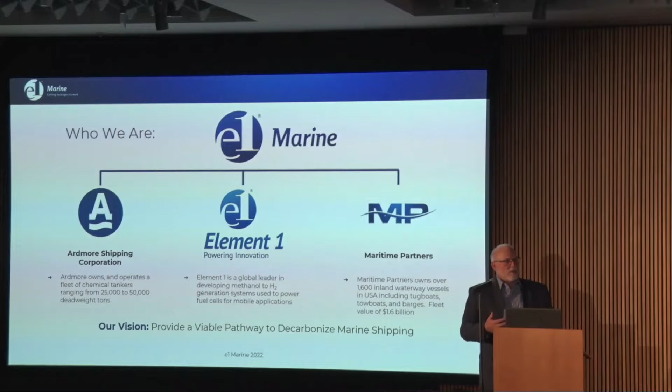Essentially, our vision as a company is to commercialize this methanol to hydrogen generation technology for the marine space in a number of different platforms. And so we'll talk more about that here in a moment.

So you've heard a lot about hydrogen, you've heard about methanol, and the fuel cell is very, very attractive to this industry. And you've kind of gotten the surface of it here, but from a pollution standpoint and a greenhouse gas point, it's really an ideal method of creating electrical power. It has no emissions other than the water, as Dave was indicating there. You also have a very high efficiency relative to any kind of internal combustion engine.

It's a static chemical process, very few moving parts, just a couple of moving parts in the system, and it has a very high system efficiency. That translates from an operator's perspective into a decreased operational cost. There's very little maintenance that has to be done, so that affects the normal maintenance you would have in maintaining a diesel engine. There's very little of that in regards to the fuel cell.

And it's also scalable and modular. Think of a server farm. A fuel cell is a stack, and you can put them in a rack system, and as you scale, you just add more stacks to your scale. And then over time, that hydrogen density continues to increase. But that's the reason why it's such an attractive platform for the marine industry, is because of its emission profile, but also these other attributes.

The challenge, however, is on the hydrogen side, and Dave was talking about that, and that the logistics of transporting that hydrogen make it really difficult from an economic standpoint to deploy it in any significant way. And when you get into the mobility side, so marine, trucks, cars, things of that nature, it really has significant limitations in regards to range.

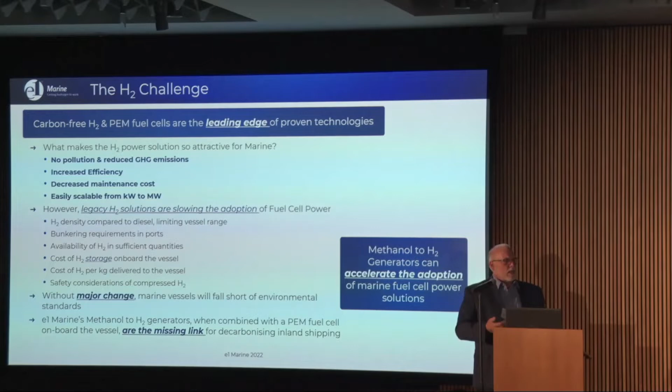And so that's what we bring to the table. People come because of the fuel cell. They come because the future fuel they've landed on, methanol, is the most appropriate for them. What E1 Marine brings is a technology to extract that hydrogen and really accelerate the adoption of the fuel cell power economy.

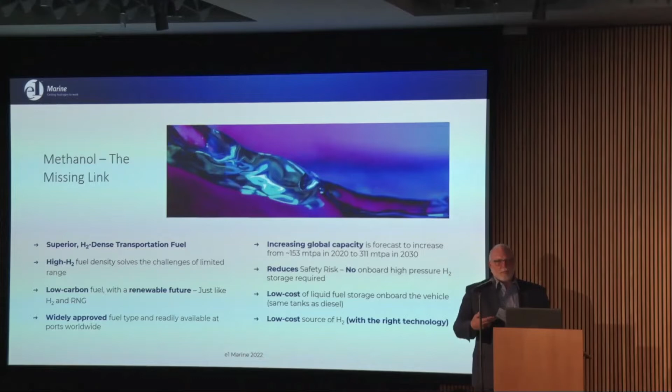So I'm just going to kind of gloss over this slide around methanol, but it has a number of attractive properties. It's a very hydrogen-dense fuel. It's low carbon. It has a renewable future, just like you'll hear about renewable hydrogen or some of the other future fuels. When you look at that total well-to-wake carbon intensity, it has the same profile, and if you add carbon capture to it, you can actually get into the negative carbon emissions.

One of the questions we had leading up to the conference is, for people who are unfamiliar with methanol, what is its general availability? Right now, it is the number 7 traded chemical commodity globally. It's used in all kinds of products. If you use engineered wood products, you're going to find methanol is the adhesive, and it's in formaldehyde. It's in the windshield wiper fluid in your car. It's all over the place, and it's bunkered in over 100 ports globally. So it's already in the infrastructure of many of our ports globally.

And so really the only issue with methanol is that last mile, just connecting it to the vessel, and all it's going to take is some demand for methanol, and that's an easy pathway to go from the bunkering facilities in the ports onto the vessel itself. And to help support the growth of that, you've also got this methanol fleet that is growing steadily. I'm sure you've seen a number of the news wires in regards to vessels being added to the fleets out there globally, and some of the larger marine companies have made announcements recently in regards to expanding their fleets using methanol as their fuel of choice.

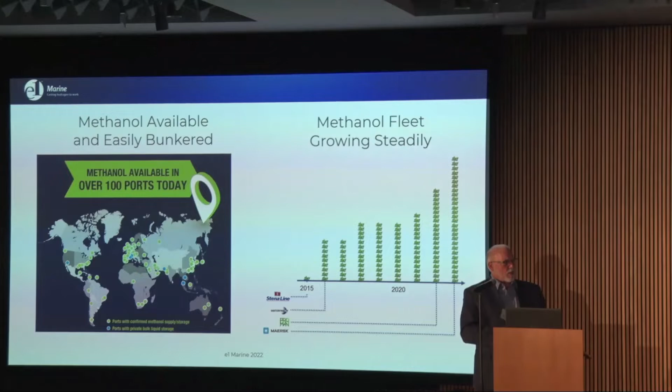When you start to look at the economics, and as you reach out to your preferred provider, whether it's the architect or the system integrator or to us, you're going to come into the cost side and the range side, and all of it folds into this slide right here, which is, why methanol? And it's really about the hydrogen density. How much range can you get? Can the vessel operate in its normal and traditional operational profile?

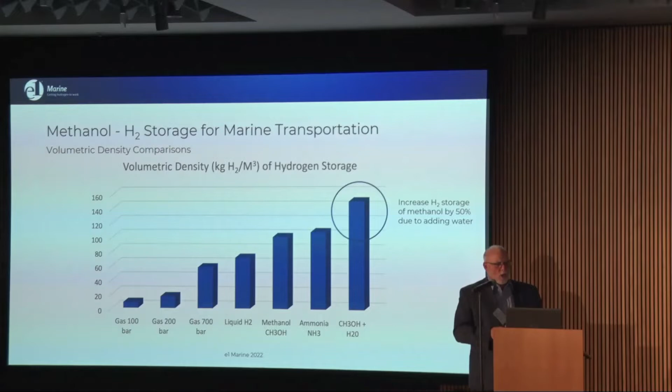With methanol, it compares very favorably to the other alternatives out there, and in this case, it's going to be ammonia and liquid hydrogen. It has a much higher hydrogen density than liquid hydrogen, and with ammonia it's comparative. But when you look at adding the water to it, the feedstock for what's called fuel reforming is actually 1/3 water. So we mix the methanol in the water, and that gives us the additional range you would get out of your vessel. And obviously, the water has a very low OpEx cost, which helps the total cost of deploying this feedstock into your fleet.

So let's talk about the technology itself. The technology is a methanol fuel reforming system where essentially we take methanol and water and go through a fuel reforming process. This is known technology, been out there for many decades, but essentially under heat and pressure, and using a standard industrial catalyst, we take this liquid feedstock and turn it into a gaseous feedstock. And then we have proprietary technology that works on a pressure differential, and we extract pure hydrogen from that gas stream, kind of like water through a sponge. And so we're able to supply pure fuel cell grade hydrogen downstream that the fuel cell can pull from the buffer tank.

And economically, we use the excess gas there to create the heat energy we need for this reaction. It's a very simple process, but I say that with caveats because it's taken Dave and many of our engineers more than 30 years to make it super simple. When you see it, seeing is believing. There's no moving parts or very few moving parts. There's virtually no sound. There's no lights flashing. It does one thing really, really well, which is turn liquid methanol and water into pure hydrogen on demand at the point of use, with economics that are about 20 to 25% of what you're going to pay for delivered hydrogen to your vessel.

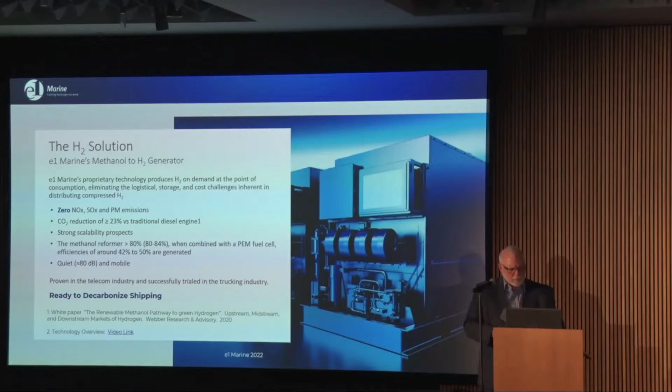Again, some of the value propositions here, if you're looking to compare to what you're doing today, what is familiar, it's a liquid feedstock. That means there's no special storage requirements other than dealing with how to handle the methanol on board the vessel, which the safety protocols are very similar, but it's liquid. You can carry it in a bucket. There's no pressurization required, so it's very, very simple.

There's existing fuel bunkering in place. It's available globally. It's available locally. Methanol is made in significant quantities here in the Northwest. It's in Portland, in bunkering facilities. It's available up here in the Puget Sound area.

From a safety standpoint with your crews, if they can handle diesel, they can handle methanol. It's the same safety protocols. There's really nothing unique or special. In fact, all the characteristics of it are generally much safer than handling any of the existing fuels that are here today.

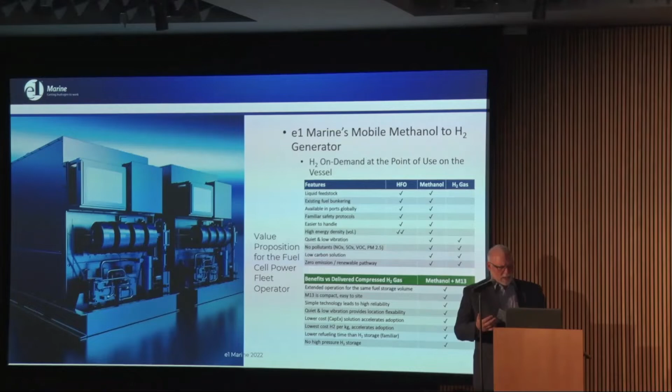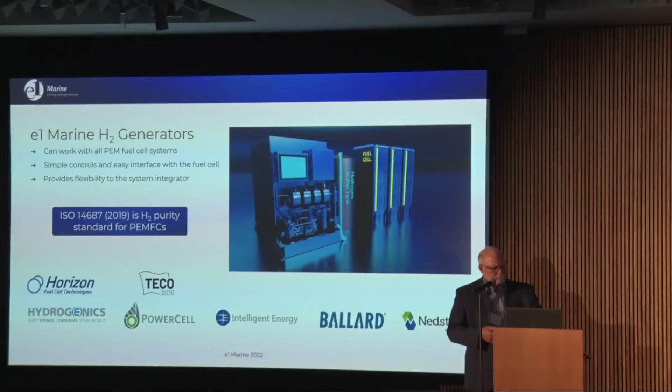Safety and certifications. So I'm new to the marine industry, but I'm learning quickly. And we've got a great team, and we're working with ABB and Elliott Bay to kind of work us through the certification process. And right now, we have AIP from Lloyd's Register, who you saw on the panel today, for our M-Series systems. We've also recently got an AIP from ABS and also from the Marshall Islands. And we'll expect to be through the Coast Guard process here by the end of this year. So by any conversations that we would start today, these will be a fully certified system ready to go on board your vessel here by the end of next year.

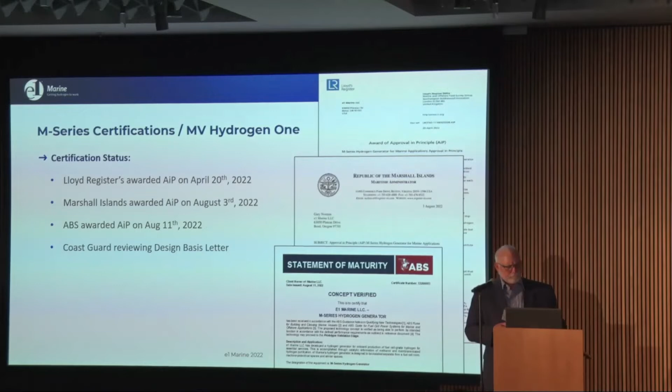I'm just going to foreshadow a little bit. Alexander Yard is going to come up here and talk about a fully containerized power solution that we're also developing, and he'll talk about its application to the ferry industry. So most of what I've talked about has been about what our technology is, how it's being used, what the process is, and how we're using our units for new ship builds. Alex will be talking later on about a 300 kilowatt container that we're currently developing that would have application for e-vessel charging for the ferry industry.

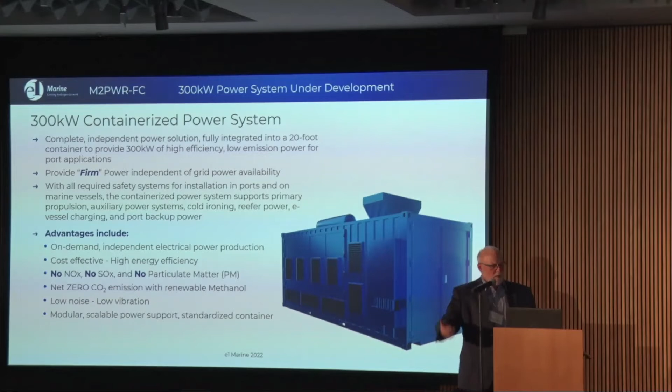Hydrogen One. This has been a tremendous path that we've been on in developing this particular towboat. We have a consortium. You've heard from Dave Leave, ABB, and Elliott Bay, two key partners here. Rix Industries is a manufacturer of this technology that you're going to hear from next. And then PowerCell. This is a consortium to put this first-of-a-kind methanol fuel cell-powered vessel on the marketplace.

It will be on the water in Q4 of next year. All the long lead items have been ordered. It's very exciting. It's getting a lot of attention, and we're very confident it's going to be a resounding success. You'll see it operating in the Gulf here at the end of next year. And some of the capacities for this, it's essentially a 4 day range, and it's going to push a couple liquid barges.

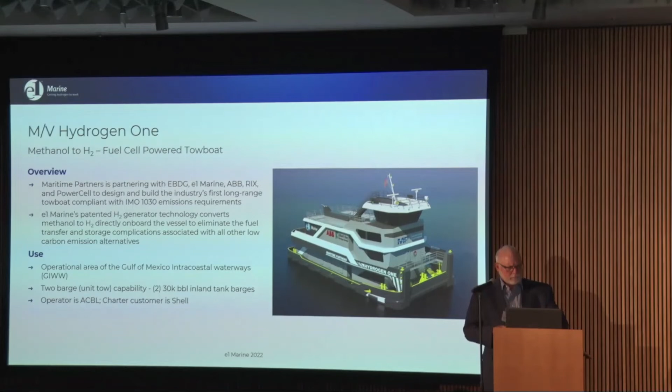Kind of the cool part of this process is that the one emission for the fuel cell is the water. And what we do is we condense that, capture that water, and put it back on the front end of the system. And so we're just recirculating the water all day long on board that vessel. That gives us the extended range, it gives us the better economics, and it reduces the amount of fuel or water that you need to keep on board for the overall process.

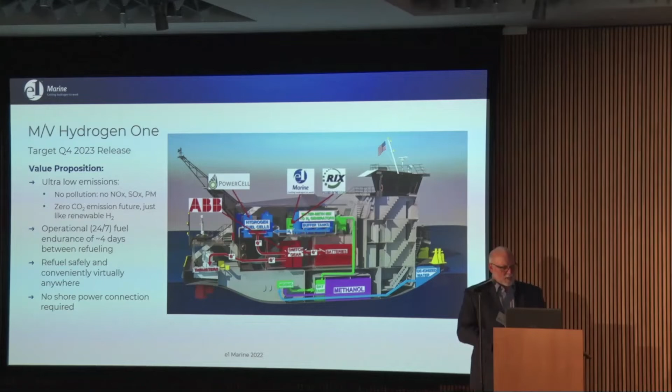Your TCO is going to be different, and the first thing that we're going to ask you is, what is your operational profile? What is your reality in regards to how you're operating those engines, which will drive efficiency? And the other question we're going to ask is, how many hours are you running it? That efficiency and how it runs really drives what your TCO is going to be for your particular vessel. Love to engage you in that conversation.

Typically, you're going to find, versus a Tier 4 diesel engine, with the carbon scrubbing that's going on there, somewhere between 5 and 11 years is where you're going to actually have a better return compared with a diesel engine. Now, when we get Hydrogen One on the water, we'll have specific empirical data that we can share with you, but from everything that we've learned with the partners that we're working with here, we feel that the economics for what we're doing are actually quite competitive with what exists today.

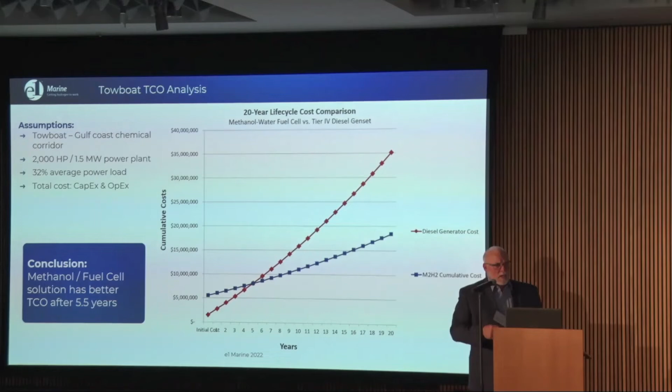So that's essentially the summary of my speech here. And what I wanted to leave you with is, if you're an operator of a ferry vessel, you came here to basically go low carbon intensity, or go green. What you're going to walk away with is that you're going to get a much more reliable system. It's a much better passenger experience and potentially a much better economic experience. I encourage you to find out more to see how that can apply to you.

And if you are an owner of a vessel, I would encourage you to reach out to your naval architect, your system integrator, and start doing data collection, because really everything starts when you start collecting the data and measuring what you're actually doing and going away from assumptions into what is your reality.

I'll give you a background first of who Rix Industries is. Rix Industries has been around a long time, about 140 plus years. As a company, our expertise and the solutions we provide are centered around gas generation systems, generating oxygen, nitrogen, and now hydrogen, as well as precision compression systems, compressing air, oxygen, nitrogen, and then finally cryogenic cooling systems.

We provide those systems for all the markets shown here. Of course, my focus happens to be the marine market. The marine market for Rix is one of the largest pieces of our business, both commercial and naval. In fact, on the naval side, Rix Industries provides these gas generation and compression systems for basically the entire combatant force, whether it's destroyers, carriers, or submarines.

And in those type of applications, we understand the ruggedized environment that these systems have to be in, and we've earned a reputation for high quality reliability in the marine and specifically the naval area that I think has direct application to commercial marine. Rix is about 200 employees size-wise. Our headquarters is in Benicia, California. We have an engineering design center that's very close to that in Fairfield, and then we have a manufacturing facility which is in Sparks, Nevada.

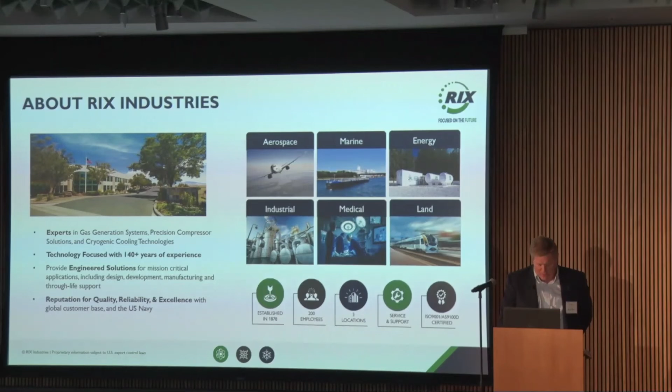And so just what's the relationship with E1? As Dave Edlund mentioned, the business model for E1 as a technology developer of this reformer technology is to license it. Rix is actually a licensee and manufacturer, and our role is to help commercialize it, promote it, of course, and design it for manufacturability.

Our second role is, as the manufacturer, we actually build these units, and then finally to help to get it through the regulatory process. And then, of course, E1 Marine has been formed, as Robert mentioned, between Ardmore Maritime Partners and E1 to help promote and drive this technology with their unique access to the commercial marine environment.

So as we look at the different types of methanol to hydrogen generators, sorry if I wasn't speaking into the mic, these three hydrogen generators: first there's the standalone reformers, which we call our M2H2 130 systems, and that particular system generates about 130 standard liters per minute of hydrogen, which is a little less than a kilogram an hour of hydrogen. That's a smaller system supporting about a 10 kilowatt fuel cell system.

The M2H2 1800 system produces 1800 standard liters per minute of hydrogen, or 10 kilograms an hour, to feed a fuel cell system. And then finally, we have on the drawing board a power system which would house the reformers, much like the M2H2 1800, combined with fuel cells in a container for a containerized power system of 300 kilowatts.

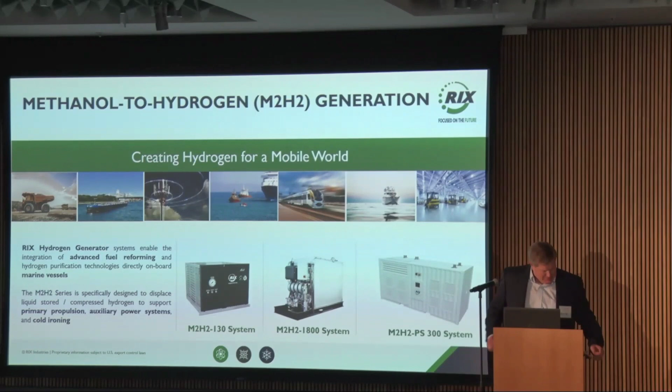As far as production, we're currently in low-rate initial production. Rix has invested in a manufacturing facility to put in the infrastructure and get the local regulatory approval for producing hydrogen generating systems like this. And currently, we've built about 3 of the 1800 series and about 10 of the smaller series hydrogen generators. And then, of course, for Hydrogen 1, we're anticipating building 10 of the larger M2H2 1800s to support that vessel.

Right now, the manufacturing facility is capable of producing 3 to 4 of the larger units, and I'd say roughly 10 a month of the smaller units. And what's not shown here, and I think Robert alluded to, as far as Hydrogen 1, we're also in the process of developing a mixing system. So methanol is an excellent carrier of hydrogen and helps to solve those issues with the storage and the logistics of hydrogen.

Since one of the outputs of a fuel cell happens to be water, creating a system where you can mix the water to methanol on site, on demand, just like the reformer generates hydrogen, is going to reduce having to carry water on the vessel as well as methanol. You can just carry the methanol feedstock.

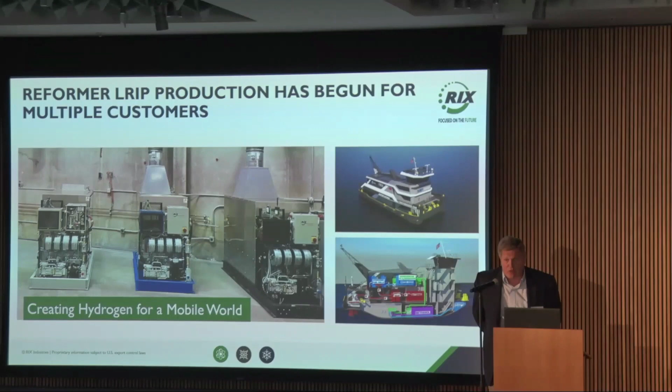So in conclusion, the technology is proven and it's commercially available today. We're in production. While it's low rate initial production, we anticipate as the regulatory approvals for the system get adopted, we're going to see increased demand for these reformers, and Rix is able to produce those. And then, of course, the delivery of the Hydrogen 1 reformers we expect by Q2 of 2023.